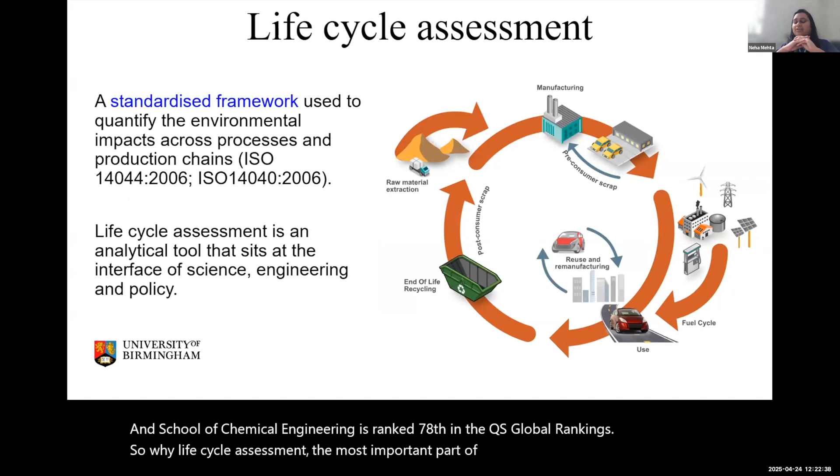So, why life cycle assessment? The most important part of why any energy transitions or even circular economy application should use life cycle assessment is because it's a very standard framework, and it's one of the most important frameworks that came after, I think, around the 1990s, when the development was going on both in civil engineering, as in how buildings should be more sustainable, but also in food packaging and food production, on how drinks or fast moving consumer goods could be more sustainable.

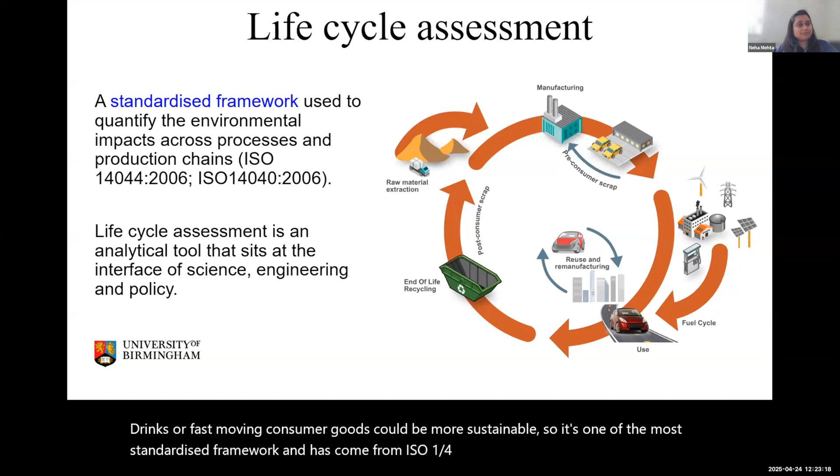So it's one of the most standardized frameworks and has come from ISO 14044 and 14040. And as a tool, it actually sits at the interface of science, engineering, and policy. So any process or any product that you would like to do sustainability analysis of, you would need life cycle assessment for that. So what does it entail?

Well, it entails measuring the quantities of all the raw materials needed, and then all the energy that has been used in the process, and later downstream how the product was used and reused, and then at end of life what products or waste were left to the environment, and those products or waste or byproducts could be left to water or land or air. So in essence, it goes from raw material extraction to end of life management as a process. And what does it give you as an answer?

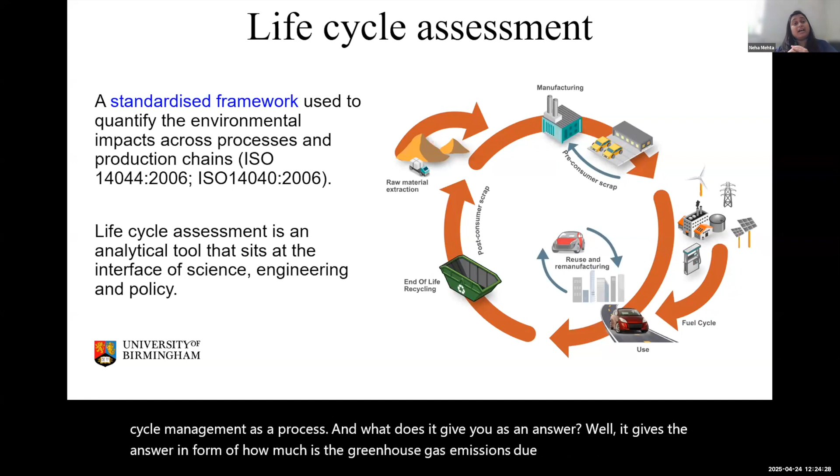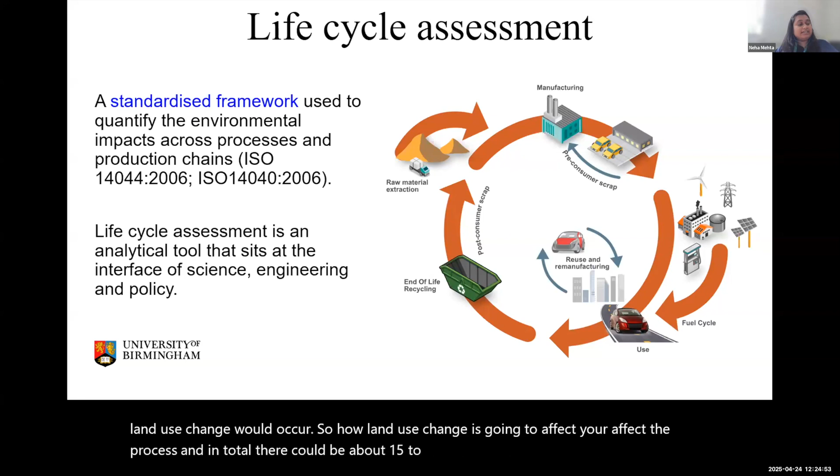Well, it gives the answer in the form of how much greenhouse gas emissions are due to a process, how much is the water footprint of a process, how much land use change, for example, if you are switching from a forest to an industry, then a land use change would occur. So how land use change is going to affect the process, and in total there could be about 15 to 16 indicators depending on the method you use for life cycle assessment. It also includes how toxic a substance could be for human life, etc.

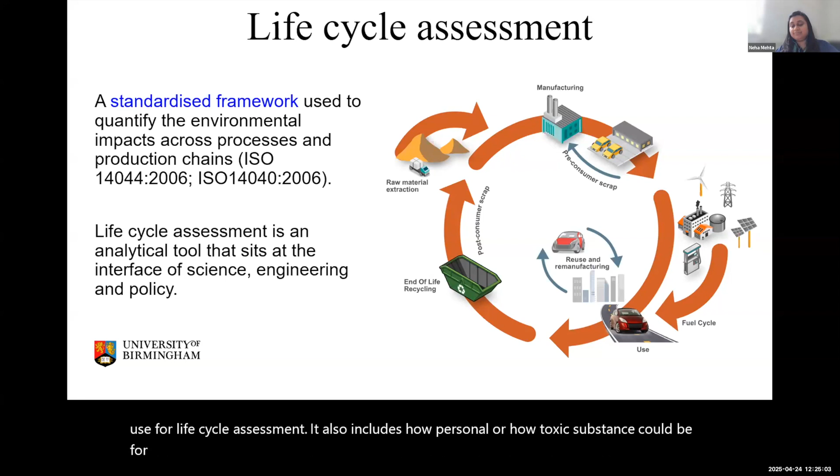So after talking about what it includes, I just want to spend one more slide on the background, and then I will take you to case studies. So the two most important types of life cycle assessment studies are consequential and attributional studies. Attributional studies are much less complex and have less modeling uncertainty. They are mostly used for checking compliance. However, if you want to understand how a full system approach takes place, how the whole system is going to affect the environment, then you would need to do more consequential elements.

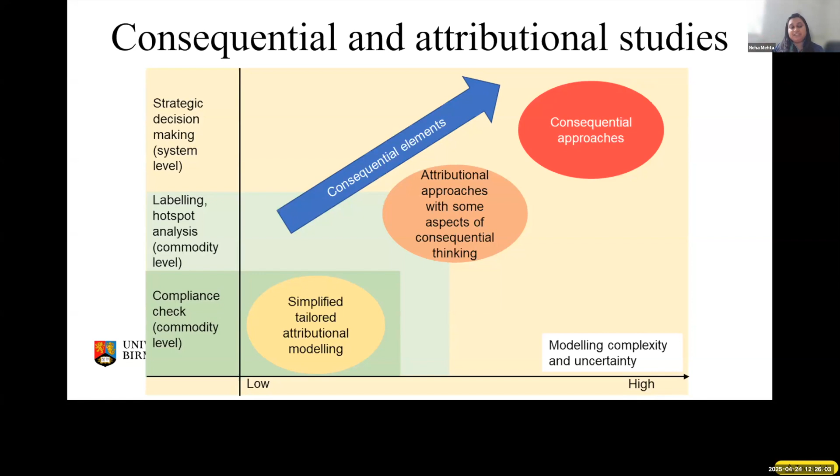So how do attributional and consequential differ? Well, in attributional you just look at the one process. You look at, let's say, manufacturing plastic bottles, that's all. But when you include consequential approaches, you look at the other processes as well, which could have some consequence from that, let's say, production of plastic bottles. Have you used other oil materials or other processes that are affecting the whole process?

So consequential approaches go beyond one process. They include two or three different processes and combine them to form an answer, and that's why they tend to be more complex and more uncertain as well, but they can be used for more strategic decision making and system level approaches.

So, my whole talk today is about how life cycle assessment studies could be used for sustainable energy transitions, and in particular for heating and cooling. And why heating and cooling? Well, the reason for that is about 50% of the global energy consumption and more than 40% of the global energy related carbon dioxide emissions occur due to heating and cooling.

Cooling demand is only going to increase more. Most of the regions are facing extreme climate events, but also changing weather patterns, which means cooling demand is increasing in almost every region and has one of the highest amount of increase that is going to come across different sectors in the coming years. Focusing on the UK, about 25% of the GHG emissions are from domestic heating.

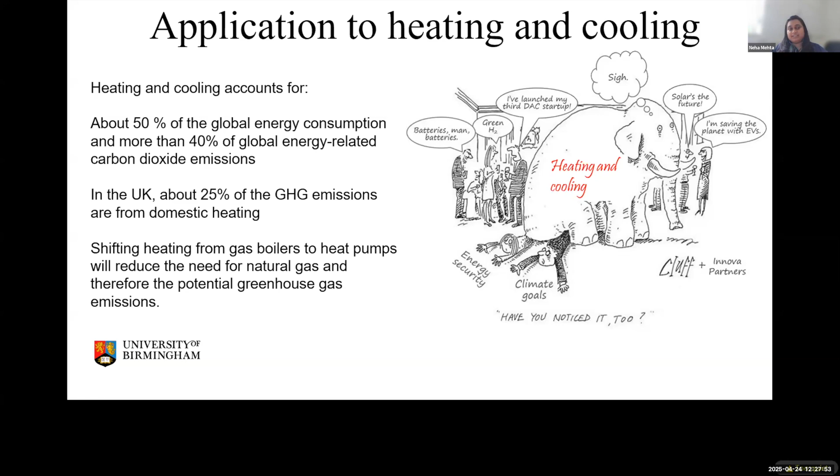So, how have I used life cycle assessment for this approach? Well, what if we were to switch from gas boilers to heat pumps and reduce the need for natural gas that is currently used in UK housing? About 80% of houses in the UK use natural gas. Can we measure how much will be the potential reduction in greenhouse gas emissions?

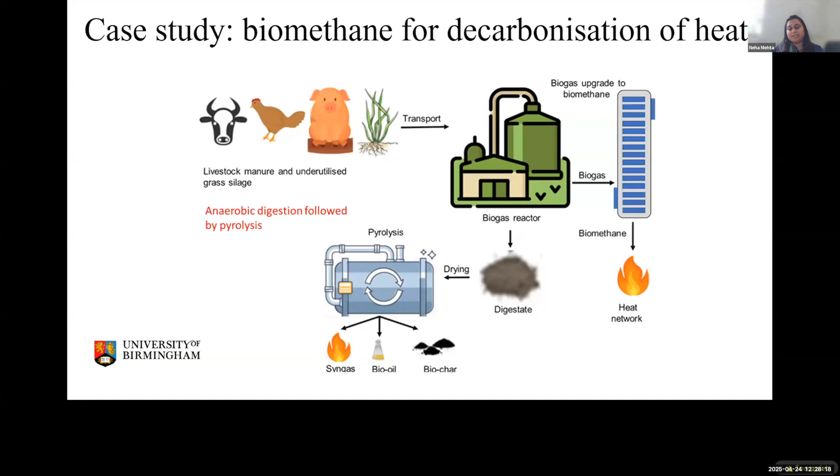So the first case study is in biomethane for decarbonization of heat. If the gas boilers were to be replaced by biomethane, then how would it work? Well, we looked at anaerobic digestion followed by pyrolysis for Northern Ireland, and looked at how biomethane could be used for decarbonization of heat and what will be the impacts of it. And our studies were actually published in Climate Change Committee and provided recommendations, and we found out that the biogas potential for Northern Ireland was about 3,500 gigawatt hours.

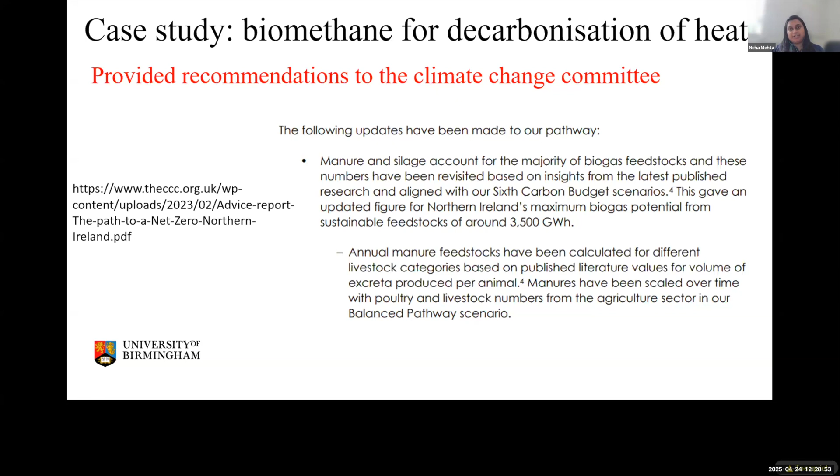And if we were to use biomethane for all of the current heating demand, then about 80% of the natural gas demand could be met by biomethane in Northern Ireland. So that's one study. Second study I would like to talk about is heat pumps deployment.

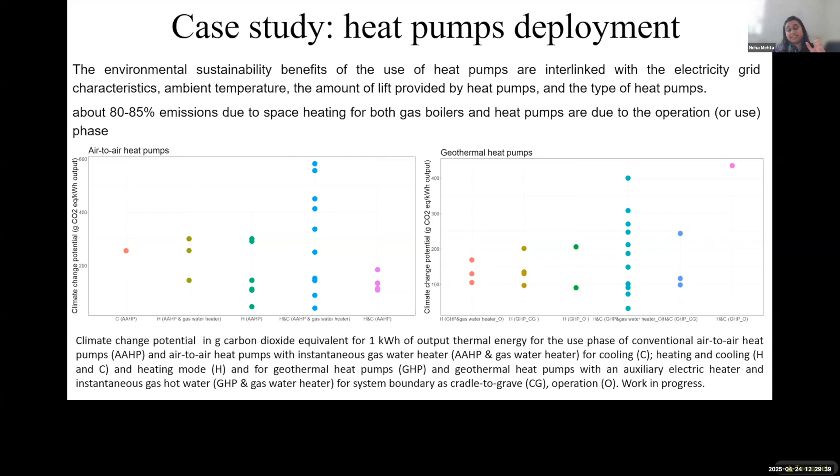So we have been studying how different heat pumps have climate change potential in different regions, and we found out that the environmental sustainability benefits of the use of heat pumps are very much related to the local characteristics, as in how green the electricity grid itself is, what the ambient temperature is, and the difference in temperature that is needed for heat pumps to work. And our literature review showed that about 80 to 85% of emissions actually happen during space heating, that is during the operations phase itself.

So we then extended this study to understand how heat pump deployment could take place in the UK. And we did the study only for terrace, semi detached, and detached houses. We didn't consider flats for deployment of heat pumps and replacing natural gas boilers, because we thought that flats would be more difficult, as normally they are rented and also have less space.

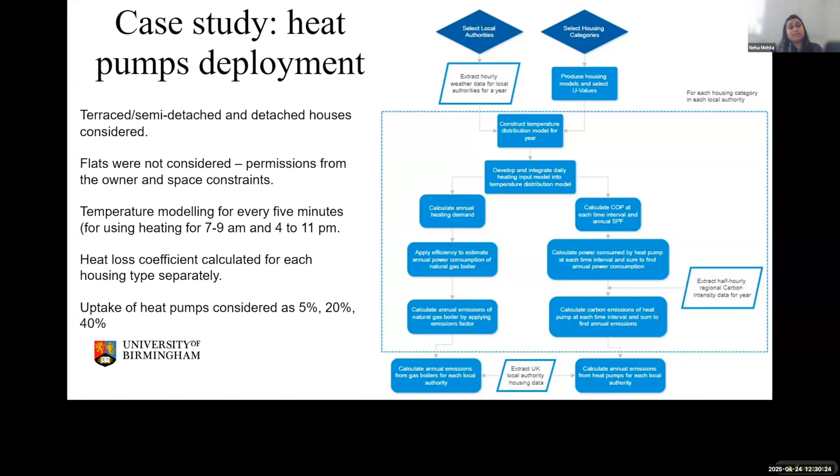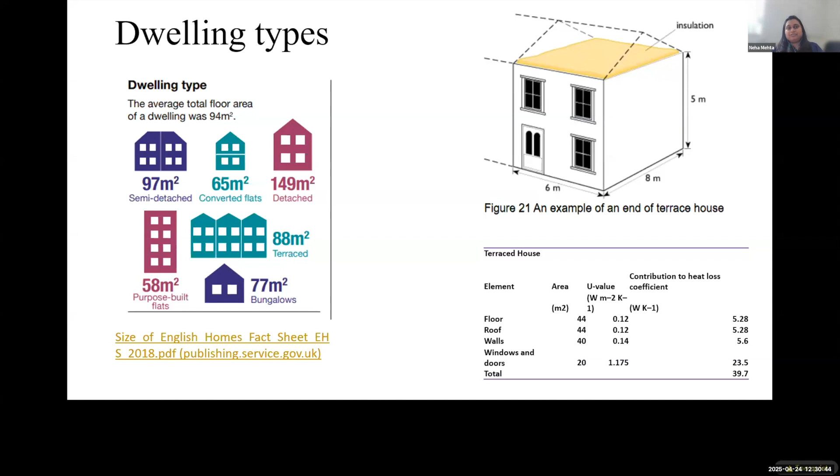We also looked at how heat loss coefficient could be calculated for each housing type separately, and how uptake of heat pumps could be considered as 5%, 20%, and 40%. Looking at the dwelling type, the size of the houses was taken as an average for all of the England houses, and varied from 65 square meters for converted flats to about 149 square meters for detached houses. And we also calculated how different heat loss coefficients would work.

And when we looked at the results, we found out that the seasonal performance factor varied from 1.83 to 1.9. Now, what is seasonal performance factor? So, if you burn something, there is always some efficiency loss. If you are using an energy device, you would not be able to take all of the energy out of it if you are combusting it, right? Like the boilers would have an efficiency of about 84%, which means that if you have used one kilojoule of natural gas, you would get 0.84 kilojoule as energy in heating the house. However, for heat pumps, it's actually up to 2 to 3 times.

So seasonal performance factor means that if you install a heat pump for the whole year, given all these conditions that I shared before as assumptions, you would have an efficiency of about 200%, as in 180 to 190%, which means that inherently heat pumps are much more efficient than gas boilers. And the reason for that is heat pumps only transmit heat. They transfer heat from, let's say, air source or ground source and heat the house. They don't really generate heat.

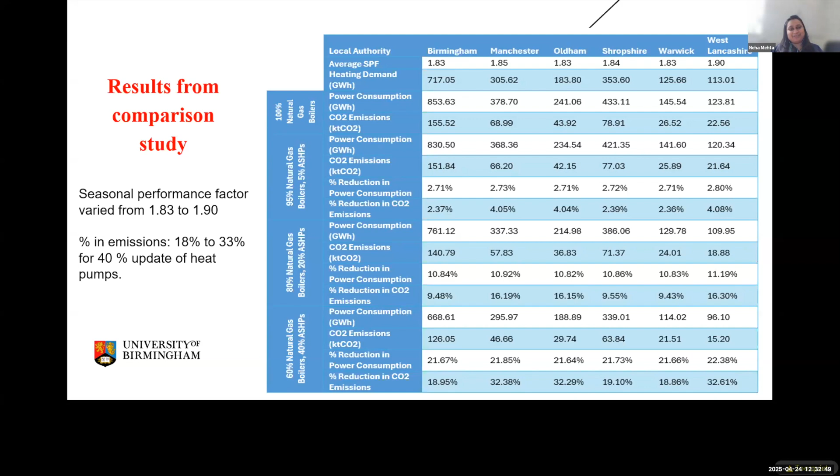His name is Roshan Ayer, so I'm just giving him a shout now. And all thanks to him, he worked really well.

Thank you very much, Dr. Neha, for that wonderful presentation. I have a quick question about the case study you shared, and I would like you to elaborate a little more on that case study on biomethane. Particularly, I'm interested in the integration of anaerobic digestion and pyrolysis you mentioned, and I would love to understand more about the efficiency of this combined approach.

When you integrate anaerobic digestion and pyrolysis, what's the role of the digestate in the pyrolysis stage? And the outputs you talked about, the syngas, the bio-oil, and the biochar, how are they utilized or valorized within the decarbonization framework? And most importantly for the theme of the conference, how scalable is this model for rural or farming communities in the global south?

So I can take the question again. No, no, it's fine. I wrote it. I can answer. Okay, thank you.